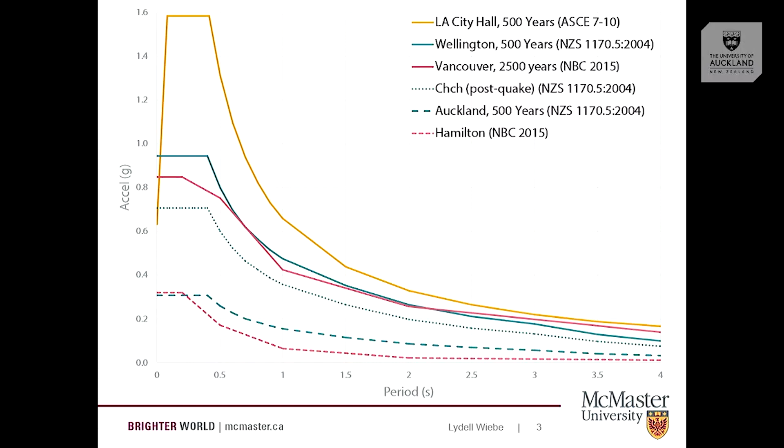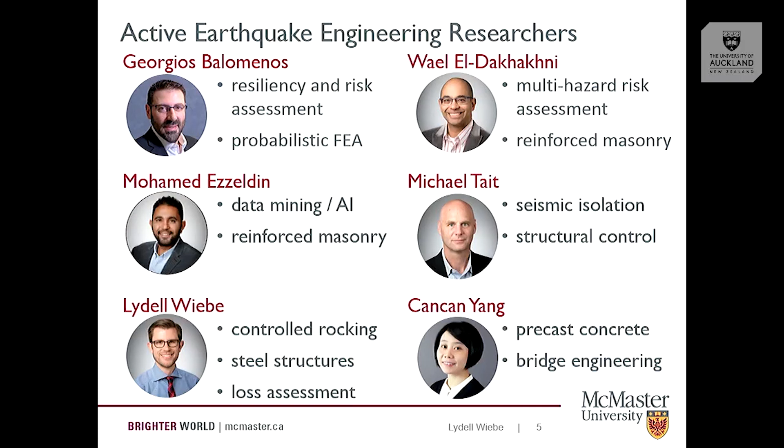In terms of McMaster University, our laboratory is not to the scale of what you have here, but there's a lot we can do. We have 3 shake tables, a series of actuators, a pretty impressive looking shock tube, and a series of other things we can do. So I'll show you some tests we've been doing at McMaster, and also some work I did during my PhD at École Polytechnique in Montreal. We have quite an active earthquake engineering research group at McMaster as well. These are some of my colleagues and myself in various aspects of earthquake engineering. So despite being far from where the source hazard is, there's a tradition of earthquake engineering at McMaster that we continue to maintain.

So with that background, my plan for the talk today is to talk first about seismic performance and what we expect if the structures are behaving as we as structural engineers might anticipate, and how we might want them to behave.

I think that many of us in this room are probably already sold on the idea that there seems to be a disconnect between what structural engineers expect and what the public is likely to expect.

I'll talk about controlled rocking braced frames in the way you would deal with them as a designer, which would be first to look at the design of the base rocking joint, then the capacity design of the frame, and then the connections to the floors. I'll go through each in more detail on the first two than the third. I'll talk about non-structural components in these systems, which I think is something we need to think about if we're looking at losses and seismic performance, and finally some other research within that general umbrella of how we might design for more rapid functional recovery.

So first off, what do we expect? What do we want? I'm sure all of you are probably more familiar than I am and have seen this presented in various ways, but what happened in Christchurch 9 years ago now. The blue dots are all buildings that were slated for demolition, and as we're quite aware, there were a lot of buildings that ended up being demolished for a variety of reasons, one of which would be the structural performance.

When I asked structural engineers what surprised them the most about the Christchurch earthquakes, the most common answer I get is, I was surprised by how well the structures performed. Given what a big earthquake it was, I would have thought we would have more significant life safety concerns with some of the buildings. From a structural engineering perspective, it seems that things are working fairly well in terms of life safety at least. And yet I think we're fairly well agreed that the public has not shared that view. So, looking at how we can rectify that disconnect.

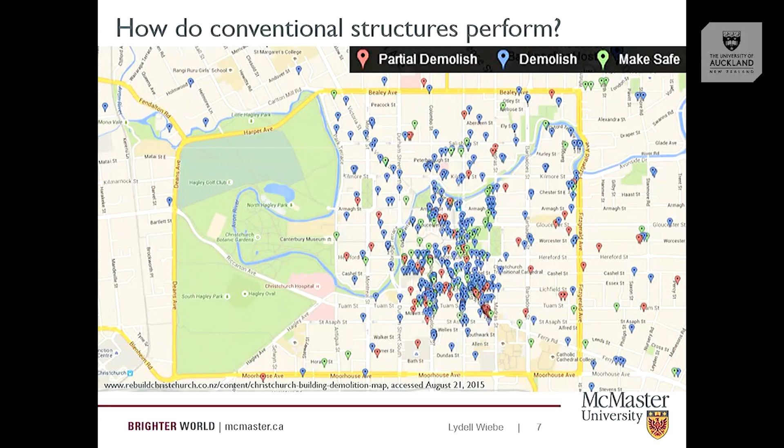I think of it in terms of a metaphor of our seismic design as being like a crumple zone for our car, which I think it even looks like a lot of what we do in structural design, as I'll show you. We design a crumple zone that will absorb the energy of the impact, and we'll design things to keep the occupant safe. I think there's a couple of key differences though between designing a car and designing a building. One is that we do not expect that every car on the road is going to get in a major head-on collision at the same time. But we do expect that all the buildings in a major urban area are likely to see quite similar levels of shaking, at least within a confined zone.

Second piece is that a car is mobile, and so if you need to replace the car, you can bring one in from somewhere else, relatively easily, and be back on the road. A building is constrained to a piece of property, and so the time it takes to figure out what to do with the building and then to repair or demolish or whatever, this, as we've seen, can take years. And then there's all sorts of other factors that come into play with cordons and insurance and all of these sorts of things. But in short, it's taking a long time, much longer than it would take for a car.

Our seismic design in steel can look like this. Here's a steel plate shear wall. It looks a lot like a crumple zone if it does what it's supposed to do. Here's a braced frame - again we have buckling of the braces. We've seen in Christchurch that there are ways of fixing things, more EBFs than CBFs there. It can be possible to fix, but still we're relying on the damage there to provide the life safety.

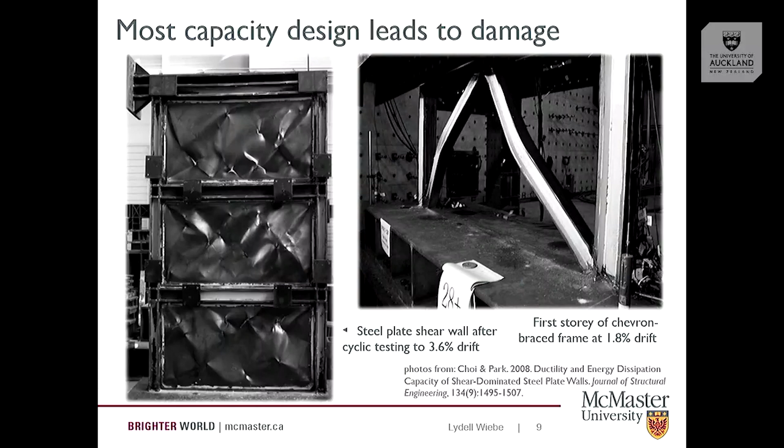And so the philosophy motivating most of my research is, can we shift our metaphor? Instead of thinking like a crumple zone for a car, can we think like circuit breakers in our home? Which also have lots of parallels. We're protecting the more vulnerable elements within the system by having something where we understand the capacity really well. But here is something where we can return it to service much more rapidly. And so that's the thinking that's motivating lots of what I'll be presenting today.

Rocking would be one system that would fit under that umbrella of trying to return the systems to occupancy more rapidly. So for a concentrically braced frame, We're relying on yielding and buckling of key structural elements, and we'll design to avoid fracture of those elements.

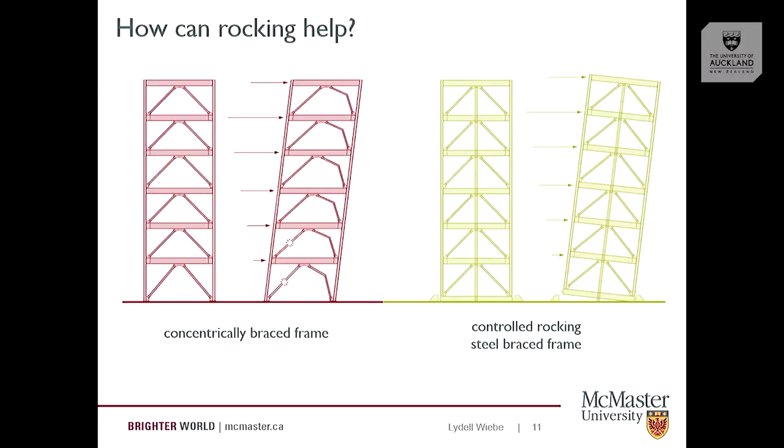We'll capacity design to ensure that the connections can develop the strength of the braces. In a rocking system, we're going to intentionally allow some limited uplift from the foundation. We will control it using a combination of post-tensioning and energy dissipation, and in that way we can have the nonlinear response that we want. It limits our seismic forces without the damage that tends to be associated with that.

In terms of the mechanics of the system, which I think are important for understanding how it works overall, it's actually fairly simple and intuitive to understand. If I think of a frame and it's post-tensioned down, when I start applying lateral force to the system, it has that high stiffness of a braced frame. So until it starts rocking, it doesn't know that it's a rocking system. Until you overcome the pre-compression at the base, it's like any other braced frame.

And then you reach the point of incipient rocking where you have overcome that pre-compression. It's easy to calculate where this is, just draw a free body diagram of the system. And then beyond that, as the system rocks, it's going to elongate the post-tensioning, and that provides a restoring stiffness to pull the system back towards zero deformation.

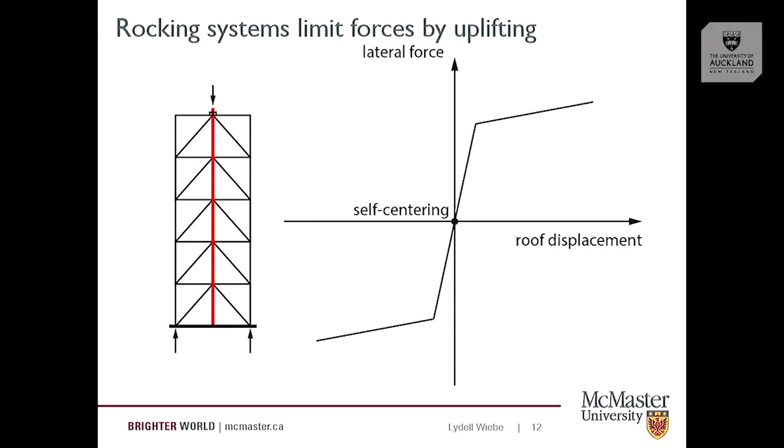If we unload and we go back the other direction, we have this bilinear elastic response, and when we take the load off, it's self-centering, so the displacement is zero whenever the force is zero. And then typically we'll provide some form of supplemental energy dissipation to help control this response.

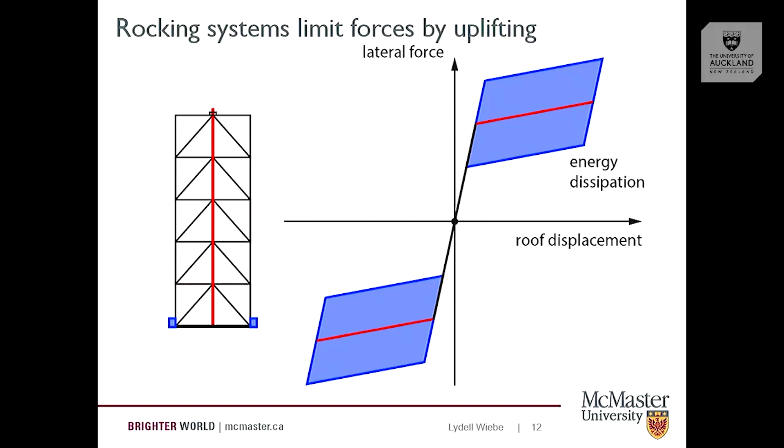There are lots of things this can look like, I'll show you some examples a little bit later. But essentially we're going to enclose some area in the hysteretic loop so that relative to a full elastoplastic system, we have less energy enclosed in a loop, but we do have the advantage that if we unload from the peak displacement, instead of having this locked-in residual displacement, we always come back through zero displacement at the end. And so that's what we're trying to achieve with these self-centering systems.

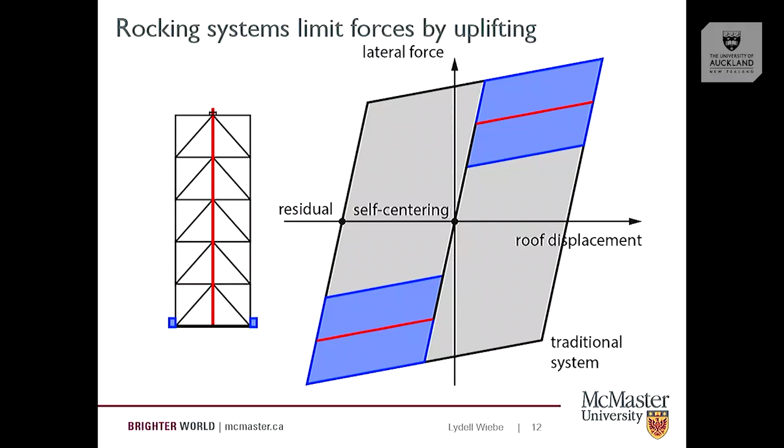In terms of what this can look like, I thought I'd start off with a video of an example of one of these. This is shake table testing that I did in my PhD, back in 2011 now. It was a 30% scale model of an 8-story frame, so about 9 meters tall, fairly representative of things, and we did this at École Polytechnique.

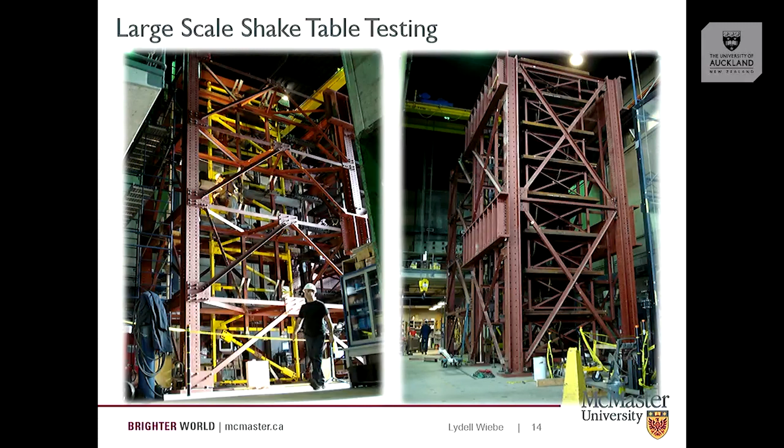On the left here is the frame. In yellow is the frame we're actually testing. The red is all lateral supports and work platforms. To give you a sense of scale, this is me working on it. And this will be a video of what it looks like in the biggest earthquake that we ran on it.

You'll have seen quite a bit of motion. Again, that was a really big earthquake. You'll have seen the uplift at the base.

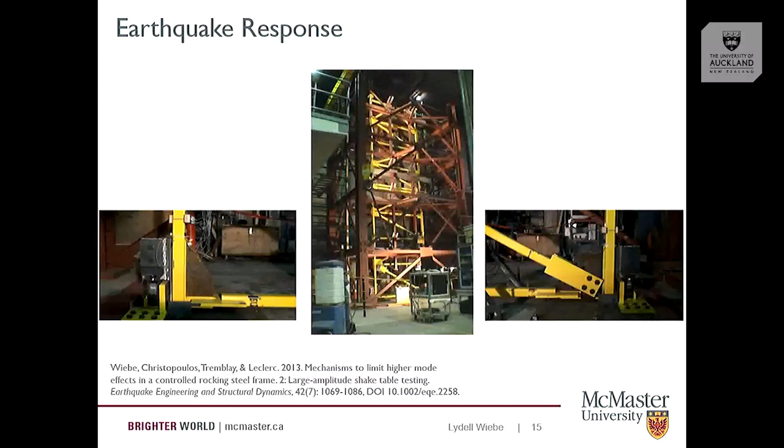You might have noticed these devices, which are friction devices. That's not the only way to build the system, but it's what we did for the lab. You'll have noticed the noise, which is coming mostly from the friction devices and from the hydraulic actuator. We ran my favorite test that we ran on the system, where we disconnected the energy dissipation, and we just did a boom with the shake table and excited free vibration. And when we did that, people would walk by in the lab and not notice that we were testing to 2% drift. It was so quiet as it rocked back and forth, which surprised me. I thought it was going to be really loud.

I should mention SCNZ has a design guide that I was involved in writing a number of years ago for the system, and it's available, published back in 2015. I think overall the framework that we set up there is consistent with what I'll talk about today, although I'm not going to go step by step through it here. There are a couple of details in there where we didn't know the answers yet, and so we put something down, and I think the research over the last few years has developed the understanding there, so there are a few pieces that I would tweak if I were doing it now, but conceptually, I still think it's a reasonable resource to refer to. So I'll point you in that direction.

So that's an overview of the performance that we would expect, where we're getting life safety fairly well, but we're not necessarily getting the return to occupancy, and that rocking provides one possibility at least to look at having a less damaged structural system, and hopefully moving towards occupancy.

So if we're thinking then about how to design it, the first step that you would use as a designer is to design what I call the base rocking joint. So essentially, what's controlling that rocking motion? What's crossing the rocking joint?

First, for the weight, the key question you have to ask as a designer is whether you're going to use a decoupled system or a coupled system, as I call it. A coupled system is one where the frame is carrying the tributary gravity loads, so the weight will be a significant factor in resisting uplift of the frame. You can maybe use some conventional detailing for the floor systems.

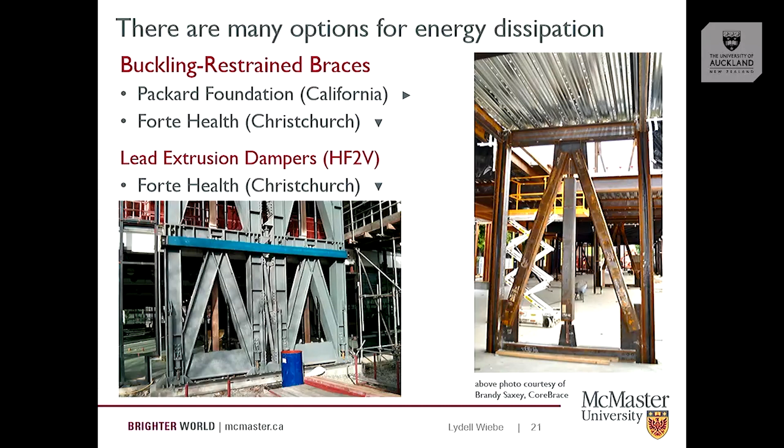Buckling restrained braces have been used — this is from the Packard Foundation in California. There have been lead extrusion dampers used at Forte Health in Christchurch, yielding plates in various configurations, and friction devices, more from a lab perspective than in practice from what I've seen, but conceptually there's no reason you couldn't use them.

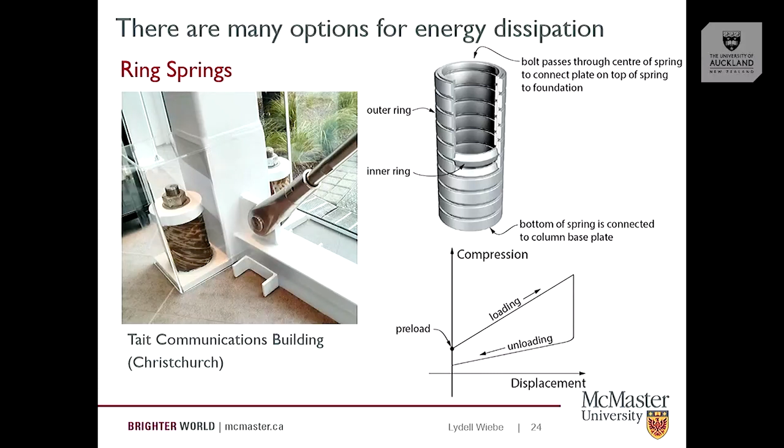Ring springs have also been used. For those unfamiliar, a ring spring is a stack of rings, some smaller, some bigger. When you compress the stack, the inner rings have to get a little smaller, the outer rings a little bigger, providing some stiffness, and there's friction between the rings providing energy dissipation. So you get stiffness and energy dissipation in the same device, which has been used in a few cases. That would be your energy dissipation.

Conceptually, you could use viscous dampers — there's lots of things you could use. But you need some way, or you will often elect, to provide some form of energy dissipation. Then, from a design perspective, if you know what you want your rocking moment to be, once you've defined the contribution from weight and designed your energy dissipation, you make up the difference with post-tensioning.

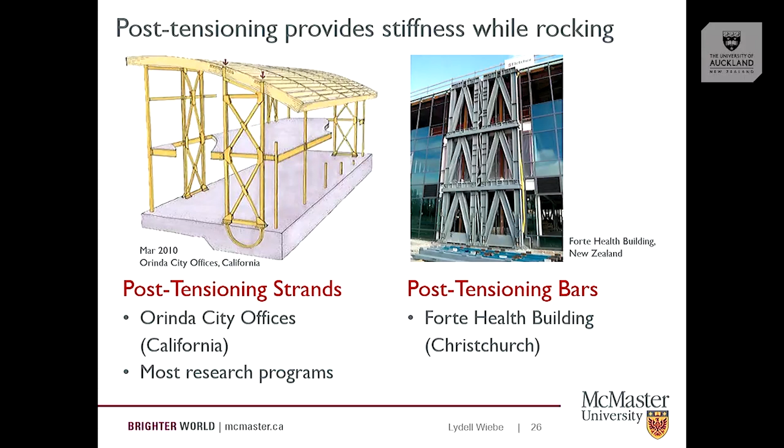That post-tensioning can take the form of strands, like they used in Orinda City offices near San Francisco, or it can take the form of bars. Its function is to provide a clamping force to resist uplift and also to provide stiffness while rocking. If you don't have that in there, you only have P-delta effects, which is a negative stiffness while rocking — not necessarily unstable.

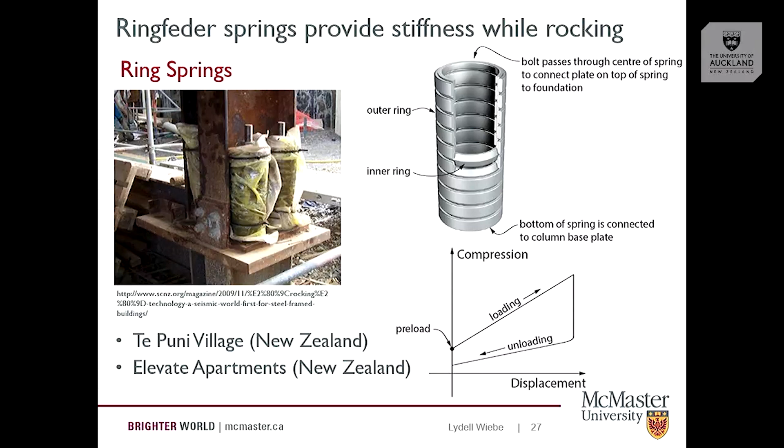There's lots of columns that have been standing in Greece for thousands of years without post-tensioning their rocking systems, but generally people, including me, will feel more comfortable having a positive stiffness in that secondary range. You can also get that stiffness from these ring springs.

So those will be the three components that you're thinking about for design, but this all presumes that you know how big you want the flag to be and what you want your rocking moment to be. And those are things that you have quite a lot of control over as a designer. It's not implicit in the system like it is for pretty much all of our codified systems. You can control the amount of energy dissipation separately from choosing the system. You control this rocking moment pretty easily.

And so what does that rocking moment need to be? How much energy dissipation do you need? From my perspective, the answer to those questions is really how large of a displacement are you prepared to accept? Because those things have a large influence on the displacement. It's not tied to ductility per se in the same way that we think about.

We tend to think of most systems as having a predefined ductility, and that controls what the strength needs to be. In this case, I think of it more like isolation, where you have a deformation capacity, and ductility is that capacity normalized by a yield drift, but you have very independent control over that yield drift. Strength and stiffness are pretty much independent for this kind of system, and therefore I find it less helpful to think in terms of ductility and more helpful to think in terms of displacement capacity, which means that as a designer, you need to be able to estimate what the displacements are on the system.

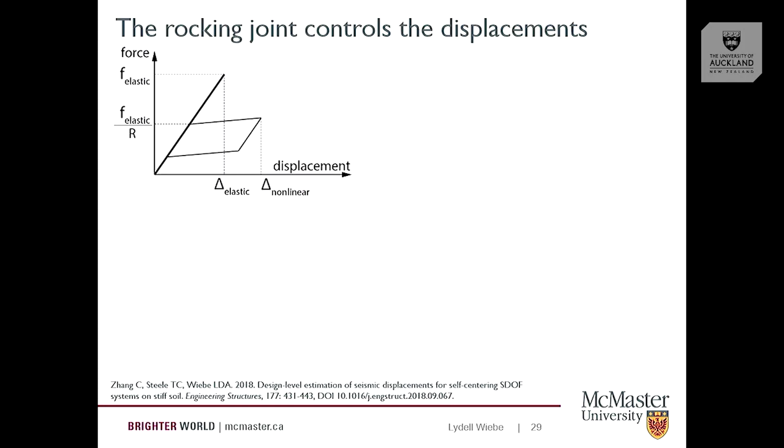So what we've looked at over the last few years is millions of studies of SDOF systems with flag-shaped hystereses, and looking at how much do they displace relative to a linear elastic system. Essentially, checking the equal displacement assumption for flag-shaped hystereses and then calibrating a correction factor to it. We find in general it does displace more. The question is how much more.

So if we look at a flag-shaped hysteresis, what I'm showing here, on the y-axis is the correction factor to the equal displacement assumption. So a value of 1 means equal displacement assumption is right. On the x-axis is the initial period, and then the three different lines are for different values of R, so something like your structural ductility factor, we call it R in North America. Essentially, R of 2 means that you're reducing your elastic design forces by a factor of 2.

So if we have R of 2, so a system that's fairly close to linear elastic, and if our period is not short, then equal displacement assumption works well if we also have the maximum possible energy dissipation while staying self-centering. So that's a lot of ifs, but we can get something like the equal displacement assumption there.

If we start increasing the value of R, so having the system rock more easily, then our displacements go up. R of 8 is the largest value in the US code. R of 30 sounds crazy because nothing is anywhere close to there. But again, I'm not thinking in terms of ductility. I'm thinking more in terms of displacement capacity. So it's not necessarily unstable when you do that. It just has bigger displacements. If you're prepared to accept those displacements, it's maybe OK. So those would be those factors.

And then if we look at having less energy dissipation, so this would be the extreme where you provide no supplemental energy dissipation, then your equal displacement assumption becomes less accurate. You need a bigger correction on it. But again, if you're prepared to accept those displacements, then you might not necessarily need energy dissipation in the system, as long as you are OK with those displacements.

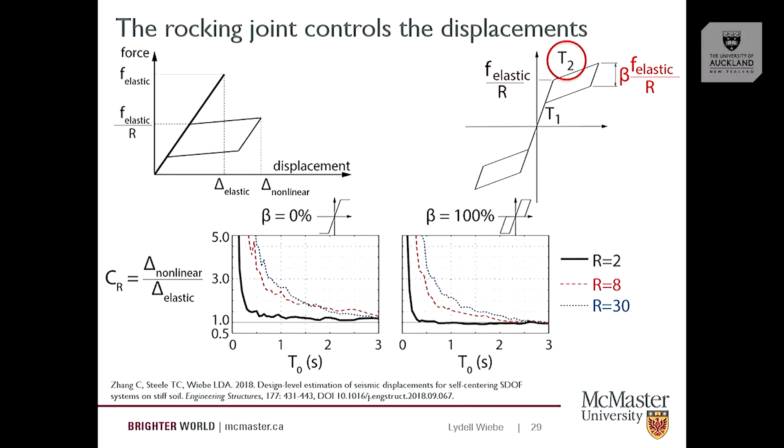We also looked at the influence of this secondary stiffness and found that it had the least influence of any of the parameters within a fairly reasonable range. If it's very high, so you're close to linear elastic with just a bit of softening, then it matters. If it's negative, in some cases, then it matters. But if it's fairly close to flat after the system is rocking, it's not terribly significant, which is why I've tended to quantify things this way as a correction to the equal displacement assumption, rather than using direct displacement-based design, which is all based on a secant stiffness, which implies that this stiffness matters a lot. So we came up with a regression.

This is the form of it, and we find it provides a reasonable estimate of the displacements for a self-centering system, at least for the cases we've looked at. I'd be very happy, there's people in the room looking at self-centering systems, if you tried it out and found out if it worked for your systems.

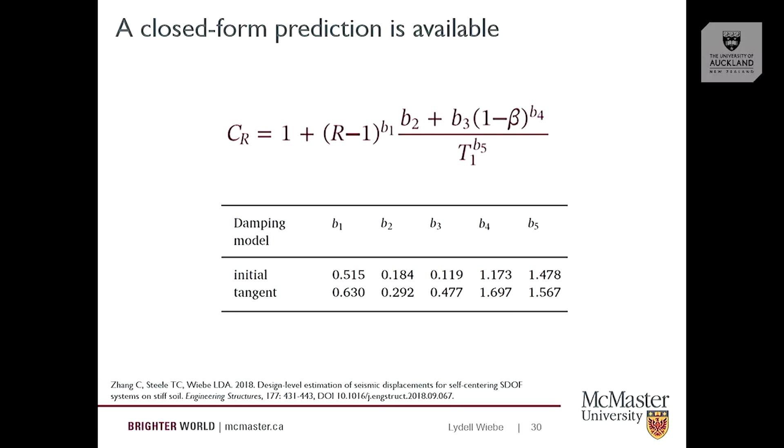Looking at what this means for collapse fragility, we've looked at questions like where do you want your post-tensioning. If you have a given rocking moment and put your PT at the edges, it's stiffer while it rocks because you've got a larger lever arm to that post-tensioning. If you put it in the middle, it's more flexible while it rocks, but it also has a larger displacement capacity because you have less strain on the post-tensioning. So we looked at the interplay between those and tried to see where we would want it to be.

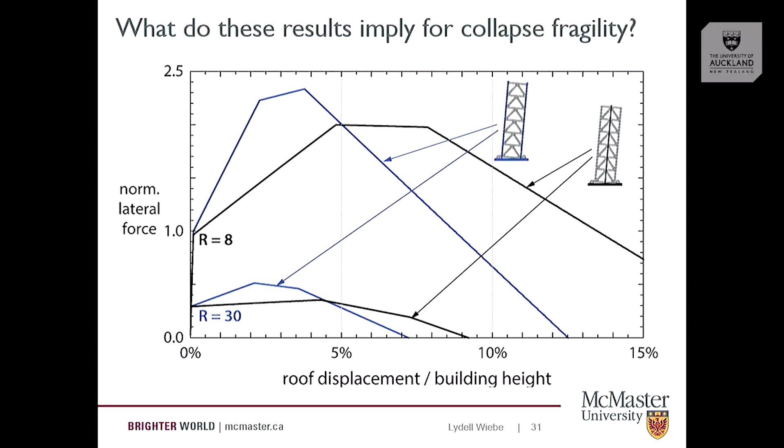Based on some modeling, I should mention it's fairly simple to model. It might feel complicated because you're not used to modeling it, but unlike most of our conventional systems where you have to calibrate some sort of material model, in this case we're relying on gaps opening, which is fairly easy to calibrate as long as you can get it to converge. Getting it to converge is not necessarily as hard as it might sound.

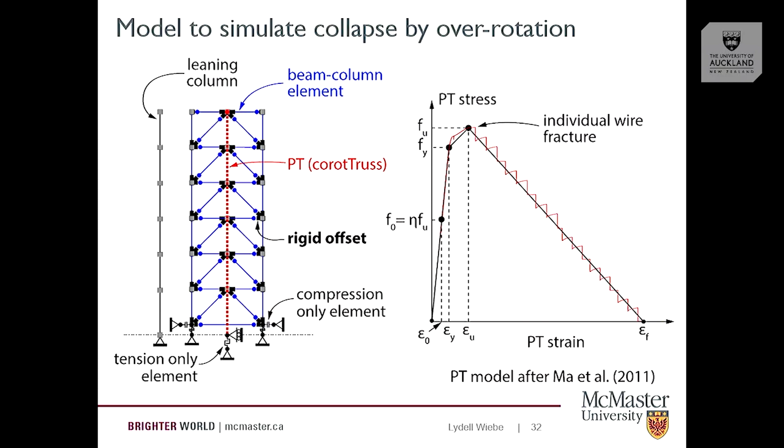In terms of collapse fragility, this is showing on the x-axis how big the earthquake is. 1 is an MCE level event for California, and we went out to huge values because we could. Looking at the probability of collapse, what we find is having it in the middle is generally better than having it at the edges, so you have lower probability of collapse. You would rather have that displacement capacity, even though you have slightly larger displacements.

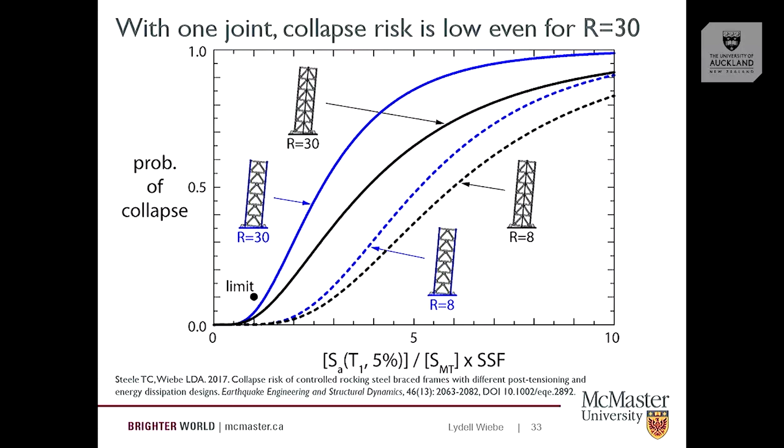Using R of 30 gives a larger collapse fragility, so it's more likely to overturn than if you use a larger rocking moment. But regardless, we're still falling under the 10% probability of collapse in MCE that FEMA P695 determines. So even a very aggressive value of the rocking moment can still provide enough stability as far as our analyses can tell.

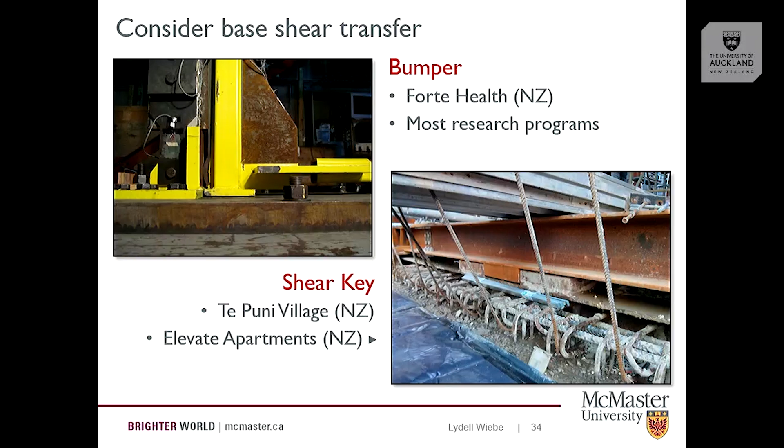One last note on the design of the base rocking joint: I've been talking about moments, but you also need to get the shear into the foundation somehow. Sometimes that's done with a bumper—here shown from my lab tests, but this is also what they did at Forte Health. I've also seen it done with a shear key at the base. So those are some options for designing the base rocking joint to control displacements, along with selecting the post-tensioning and energy dissipation.

The next piece is, after you've designed that base rocking joint, how do you design everything else in the frame? What are the loads on those members? This kind of boils down, maybe oversimplified, to a question of how heavy the frame needs to be.

What we see is we got nowhere close to fracturing the post-tensioning at the base rocking joint, but the moments above the base were quite a bit larger than what you might expect from a pushover. Your base shears could be more than twice what you would expect from a pushover. So this is fighting against capacity design, where we're trying to cut off the forces by having a well-designed fuse.

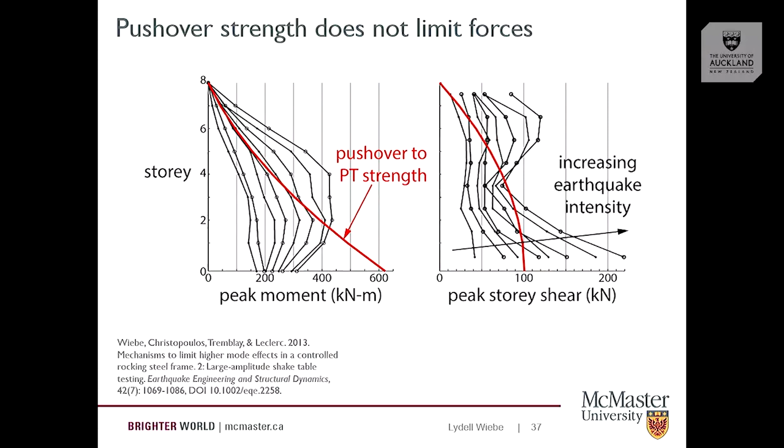We're finding that the moments and the shears continue to increase from there. The way I think of this is as it rocks, you're going from a fixed-based system, shown in black, to a pin-based system, shown in red. You're removing the rotational restraint at the base. If you do that, you can compute the mode shapes for a pin-based structure, even though it's unstable.

Mode 1 is the unstable mode. Mode 2 has a longer period, but generally has a fairly similar shape in terms of displacement, forces, shears, and moments. Mode 3 gets even closer, and so on. So you can think of it in terms of the combination of these modes.

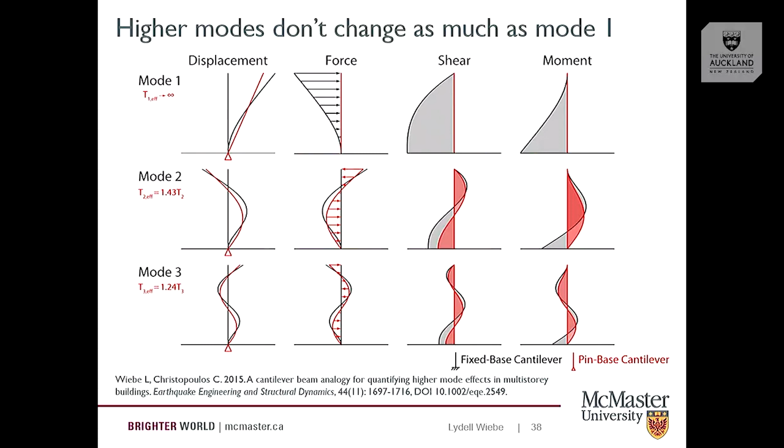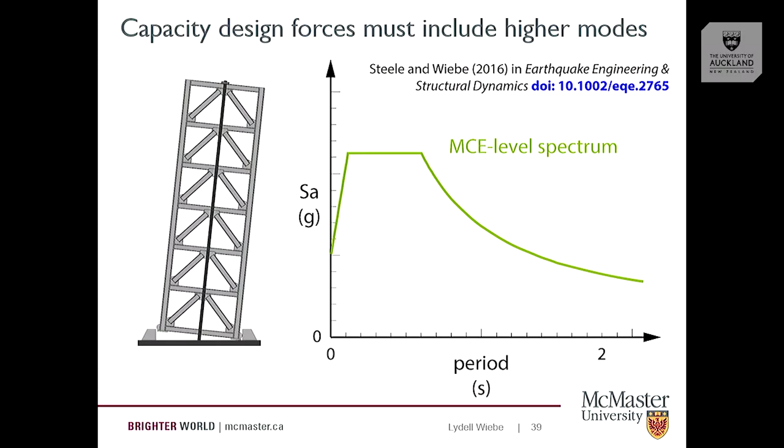And then we turn this into a design approach as well. So for one of these frames, if we're modeling what's happening while it's rocking, and we have a design spectrum, what we can do is take a model that you'd have in SAP or ETABS and model it like this. You keep one of the pins at the base, the other one you take away, you show the energy dissipation that's on there, you apply your pushover forces, you apply the post-tensioning to whatever you're expecting to be the displacement or the maximum capacity, however you want to do it, and then you add the higher mode effects computed from a response spectrum analysis as done within ETABS. So it's something you can do within a computational program you're using anyway.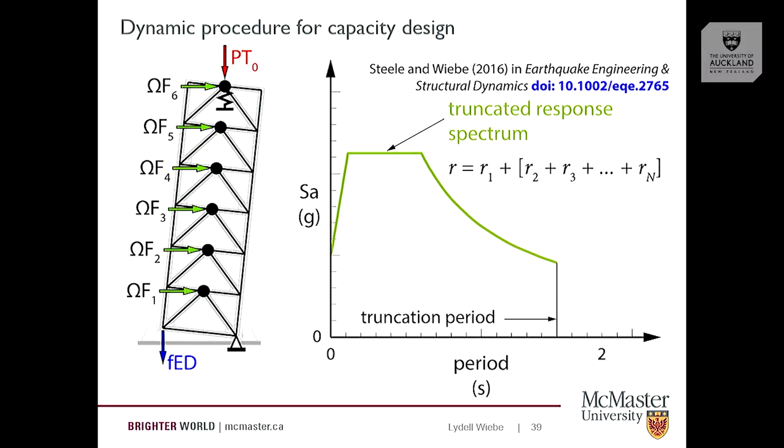The other approach we've looked at is to simplify things, because here you have to play with your boundary conditions, which is a bit of a pain if you're changing your design back and forth. So we look at an equivalent static approach where we simplify what we expect those forces to be.

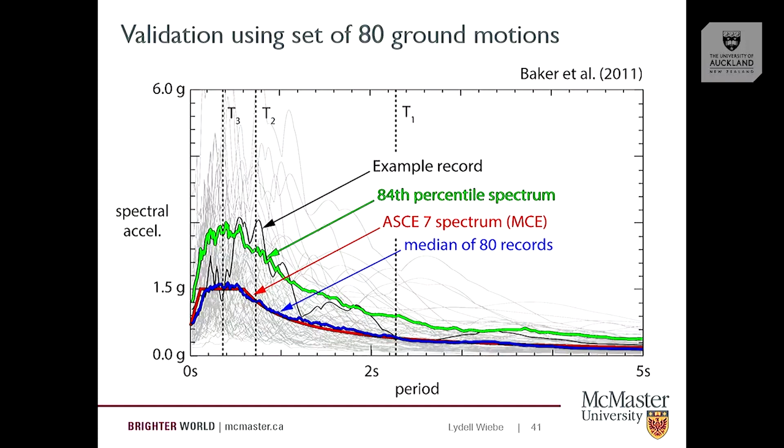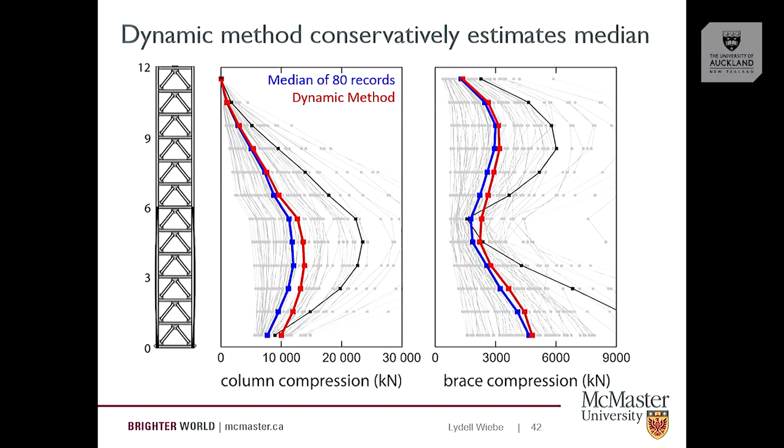To validate it, we look at a set of 80 records. This is the target spectrum, and blue is the median of those 80 records. We looked at this example for a 12-story frame. The blue is the median, and the red is what we get from modeling with the changed boundary conditions. You see we can capture the column compressions, which look a lot like a moment envelope, and the brace compressions, which look a lot like a shear force envelope, by using this approach.

If we use the equivalent static forces, we also get something that seems quite accurate, and it's not an empirically calibrated approach. It's all based on theoretical assumptions about how things behave.

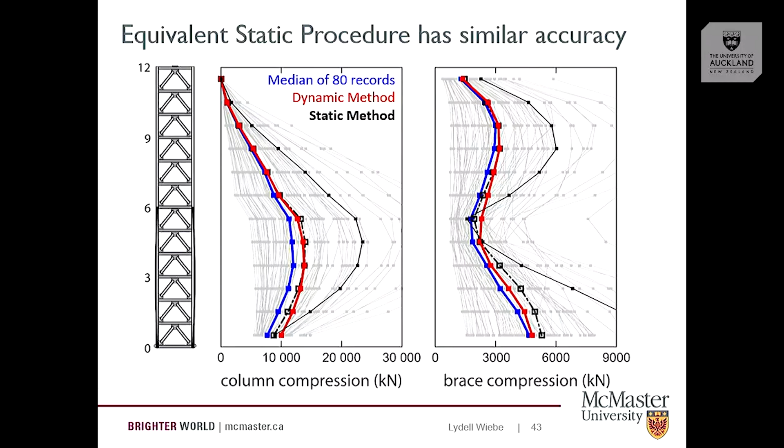We can target it to whatever level of excitation we want, because as the earthquake gets bigger, the demands get bigger, which leads to the question of how large you should target. If you don't consider those higher mode effects at all, and just design based on the pushover, you get the gray line here. If you design for 3 times your design spectrum, you get the black line. If you design for, say, 1.5 times design shown in blue, that would be MCE in Canada or in the US, which is a lot of what's been recommended or assumed by researchers. There's a pretty big difference in terms of the design forces on the elements of your frame.

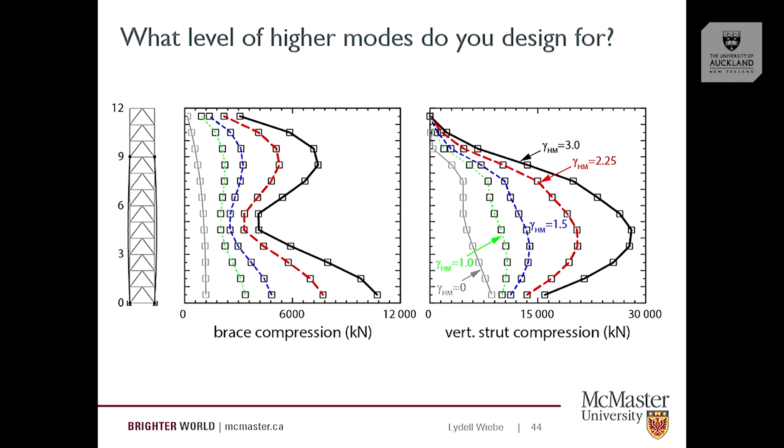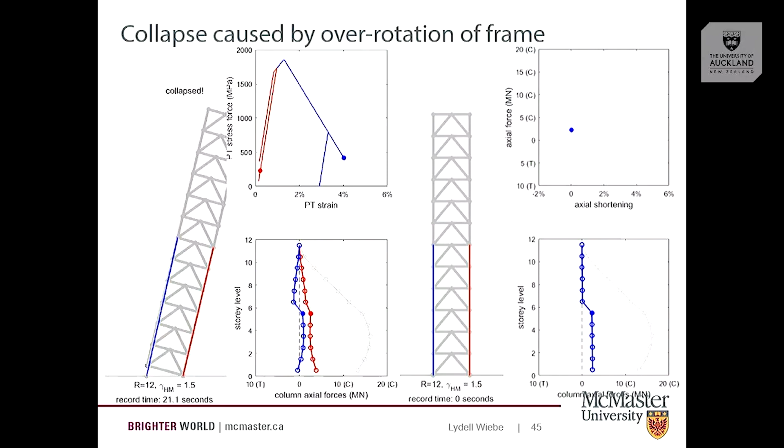The philosophy motivating this is: what would be the code minimum for this sort of system? If we wanted it to behave at least as well as anything else, what do we need as a minimum? So to prevent collapse, we model that sort of thing. We also model what happens if there's buckling and yielding of frame elements. In this case, we'll see buckling of that column under a slightly different earthquake. Again, we're looking at modeling what happens in that case.

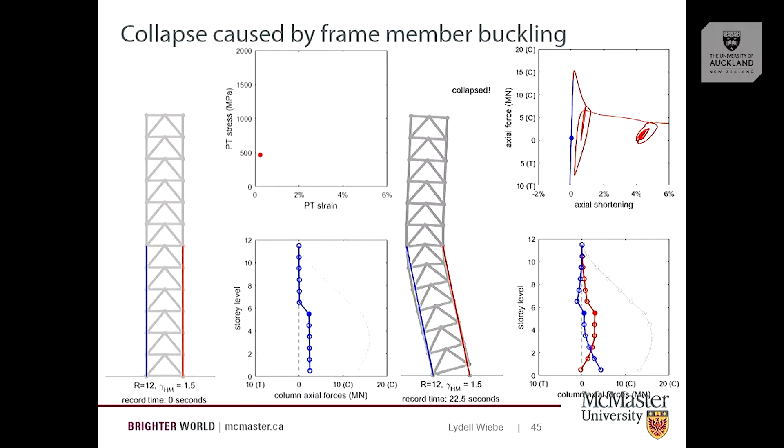So it depends on how you've designed things. If you really over-design your frame, it's going to fail by overturning. If you really under-design your frame, it'll fail by elements buckling and yielding. And ideally, we would calibrate both so that it's not going to fail under a reasonably defined earthquake.

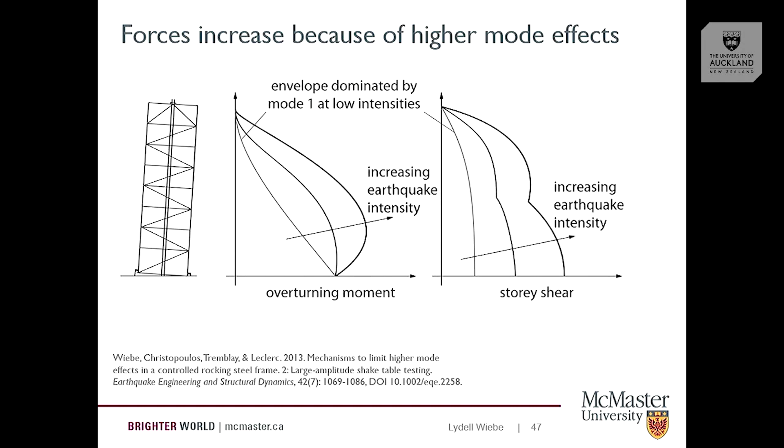Finally, on the higher mode effects, all of this is assuming that you just have a rocking joint at the base. But some of the thinking during my PhD was, if you can control that rocking at the bottom by having moment control at the bottom, why limit yourself to one location? Why not have rocking at a second location, where you should limit the moment there, and then you would expect that to help control the moment between those locations. And because the shear force diagram is the slope of the bending moment diagram, you would expect to get some control over your shear forces.

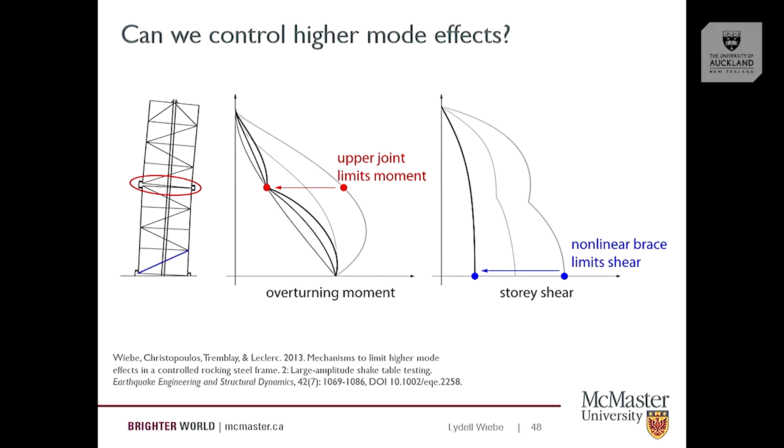Or, if you put a fancy brace in here that can still be self-centering, but that can cut off the higher mode shear forces, that should help to control your moments.

So we took the same experimental setup I showed you before. It was built as two frames, one on top of the other, so we could clamp them together, and that's the first video I showed you. Or we could release that clamping, and replace the brace at the bottom with one of these fancy self-centering ones, and look at, for the same frame under exactly the same earthquake, how the response compares.

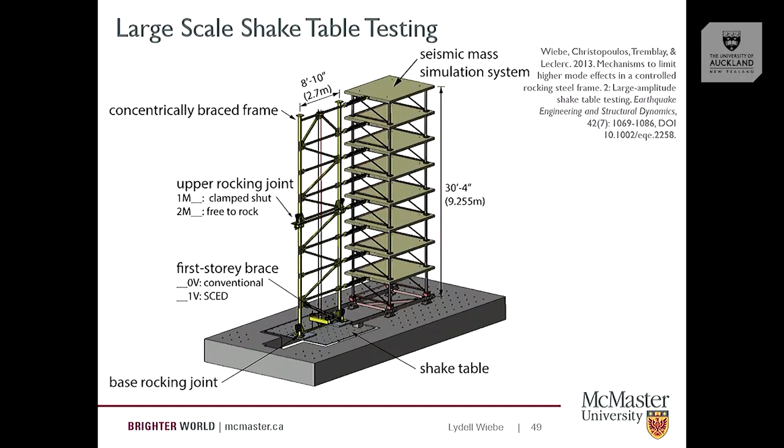And here's a video of the same earthquake, but in this case it's allowed to rock at this upper joint. You won't see it in the video because it's very fast and it opens about 5 millimeters. But you will see the motion of this brace, which is a self-centering energy dissipative brace.

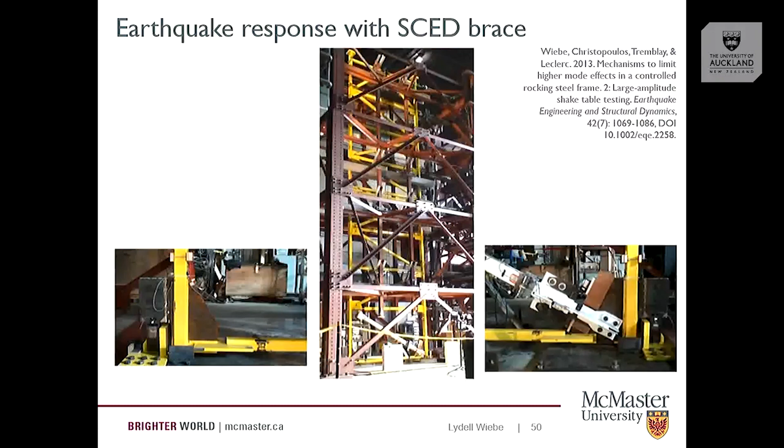So unless your eyes and memory are better than mine, you won't be able to compare that directly. So let me do that for you. This is from the first video I showed you, and this is from the second one. The area grayed out is the area outside the envelopes of displacement, shear, and moment. Shears and moments are calculated based on the accelerations of the floor masses.

So you see the displacements in this case are almost the same. They're a little bit bigger in the second video, but maybe 10% bigger. The shears are roughly half of what they were in this case. The moments above the base are much more controlled.

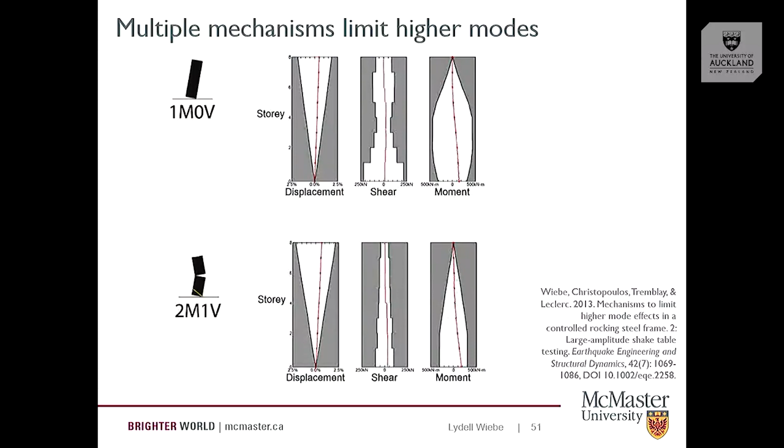And if I animate it, again, this is not a computer simulation, this is what we measured in the lab. You'll see that the displacements are quite lined up between the two. It's driven by the first mode of response. But those shears and moments are cut off by having multiple mechanisms in the system, which is like what we have in most codified steel systems, where if you develop higher mode forces, something yields somewhere else. But that's not the case with a rocking system with rocking only at the bottom.

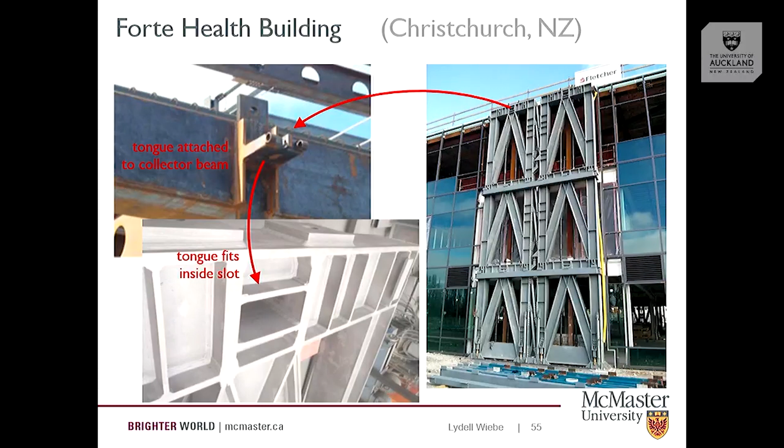So those are some issues related to the capacity design of the frame. Moving a little bit more quickly on the connections to the floor diaphragms. I talked earlier about this idea of coupled versus decoupled. If it's coupled, the connections may not need to be so fancy. If it's decoupled, then we need something that can transfer the horizontal forces without lifting the slab up along with it. So in Forte Health, what they did for this is they have this tongue that's coming out of the collector beam, and that fits inside a slot so that when it's trying to transfer the load, the frame can lift up without engaging that floor slab, which seems like a reasonable solution.

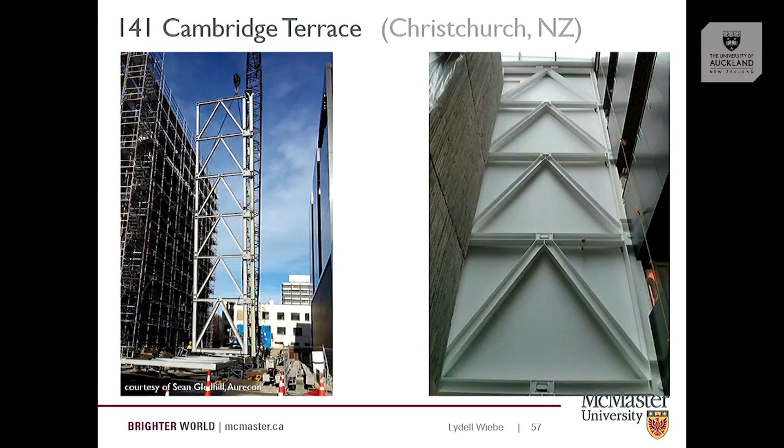At 141 Cambridge Terrace, they used a similar detail, and they also provide a pin in a slot so that there's essentially a backup system if either of the two doesn't work the way that it's intended to. This is what it looked like, or another picture of it in practice.

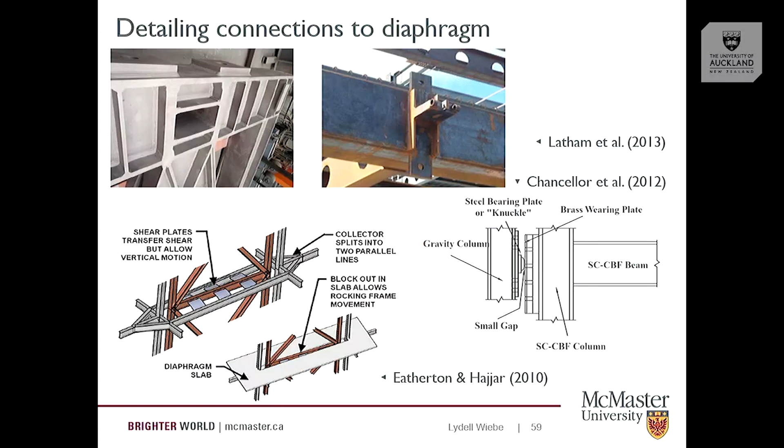And there have been a number of options that have been suggested in the literature. Not many of them have been tested, so this is something we've done at Mac over the last few years. These are the three that we tested at McMaster. There's a bearing plate type system where we have a rounded plate on a solid one. We tested a pin in a slot, and we also looked at a wide flange connection.

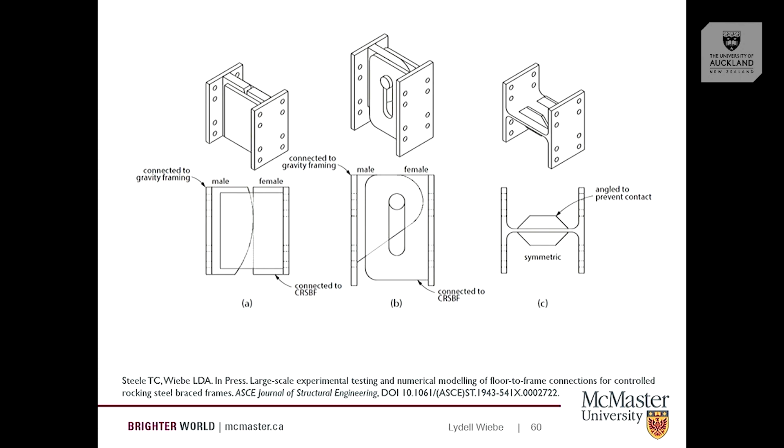So here we're going to yield essentially the plate so that there's relatively little resistance to uplift, and look at how these perform. It's a 60% scale model, and I'll show a time lapse of this testing. It wasn't dynamic, it was static. The way this is working is this gray beam is simulating your collector beam, so load is being applied to it by an actuator, and that transfer mechanism is hidden behind here.

It's transferring very large horizontal loads, up to about 1,000 kilonewtons, into the yellow frame, and we're controlling this red beam with actuators acting down on it, simulating the post-tensioning, energy dissipation, and all the things that control the resistance of the system, so we can see a fairly complicated combination of displacements and forces and how that load is being transferred.

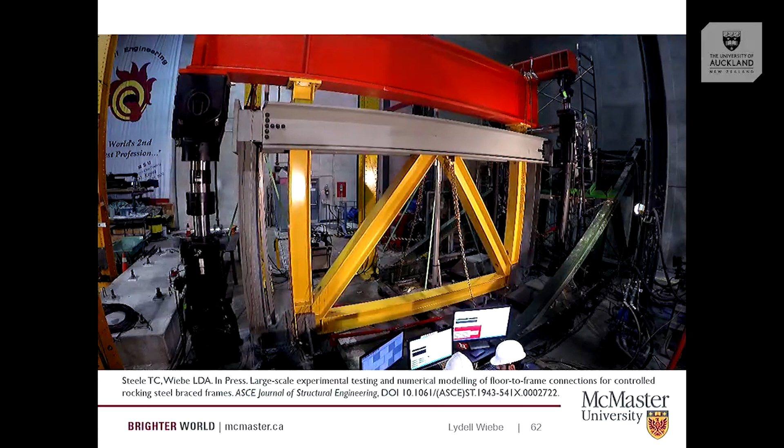And here's what it looked like for the bearing plate system. You see it's not that far off, actually, from a flag-shaped hysteresis, which is not necessarily bad, although there's no energy dissipation in the system that we were testing. So this is coming entirely from the friction at that connection.

Often the way these have been designed is assuming that you can transfer the load and that it'll be like a perfect slider where there's no energy dissipation. So you might look at this and say, this is a good thing—I have energy dissipation I didn't count on, so I'll have less displacement than expected. You could also look at it as I have larger forces than I expected, and that might be a concern for capacity design.

So my view tends to be, this is not insignificant. We should probably be accounting for it in design if we expect it to be there.

We got similar performance if we put the pin in a slot, but we were able to get rid of that if we wanted to, so we could get something with very, very little energy dissipation. The way of doing that was by having the pin only on one side, the side that was pulling.

If I have a rocking system and I'm applying my load in compression here, then I have lots of sliding there and lots of energy dissipated. If I put it on this side, where it's pulling, I don't have very much displacement, and since force times displacement is the energy, I'm not going to dissipate much energy. So from a capacity design perspective, this might be preferable, although it's dissipating less energy.

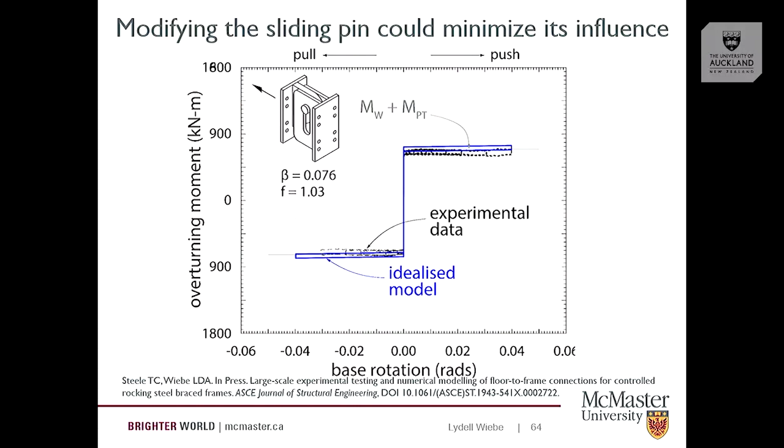But it's about trying to get our buildings to behave in a way that's consistent with the models, either by changing our models or by changing the buildings.

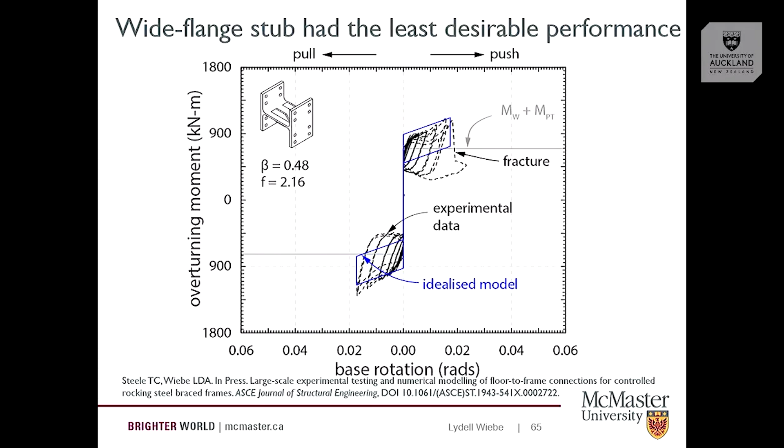Finally, that wide-flange stub had the least desirable performance overall. It probably feels more comfortable because you have a full mechanical connection in there, but it fractured at about 2% drift, which, if you control your displacements, is maybe okay, but it's kind of on the low end, and a less repeatable response than what we saw with some of the others, at least in the short term.

Finally, on the controlled rocking system, non-structural components are something we need to be thinking about. There's not much value in having wonderful, seismically isolated, top-of-the-line non-structural components in a building that needs to be demolished after an earthquake. But by the same token, if you have a wonderful structural system and everything in the building gets trashed by the earthquake, your client will probably not be terribly satisfied with that either.

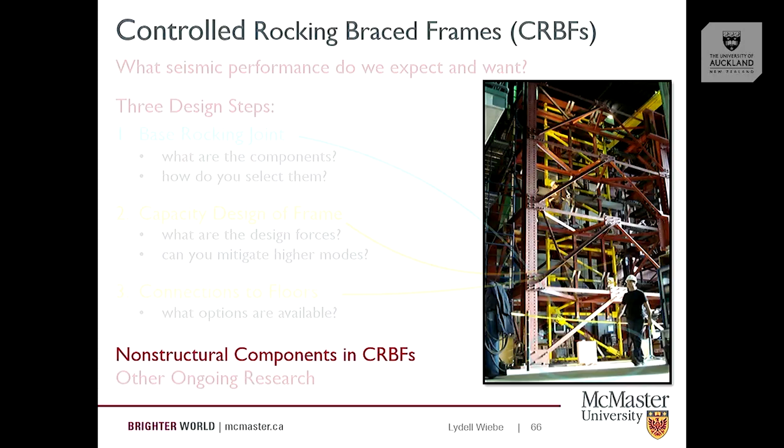So we've been trying to quantify these demands a little bit better, with two key questions. One of them is, will that change in stiffness from low to high at a velocity cause acceleration-related damage? This is based on some theoretical work showing that if you go from low stiffness to high stiffness at velocity, we'd expect an acceleration spike.

Notice this occurs only in a system with a flag-shaped type hysteresis. With a more full elastoplastic hysteresis, you're always softening—you're always going from high stiffness to low, except when you change direction, and then your velocity is 0. So it's something unique to this system that might be a concern.

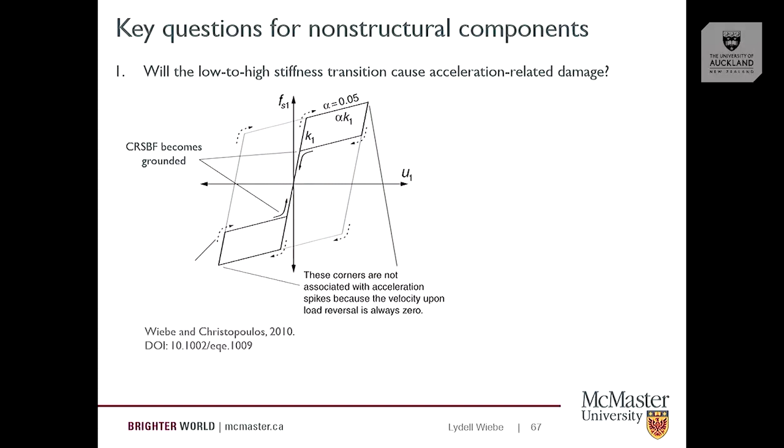That's how I thought about it, and then it was put much more memorably by some people at the University of Canterbury, where they say if you're on a motorbike with very little resistance to your motion, and then all of a sudden there's a spike in stiffness, you'll expect a large acceleration due to that. So this is the image that's in my mind, and I'm sure it'll be in your minds now too.

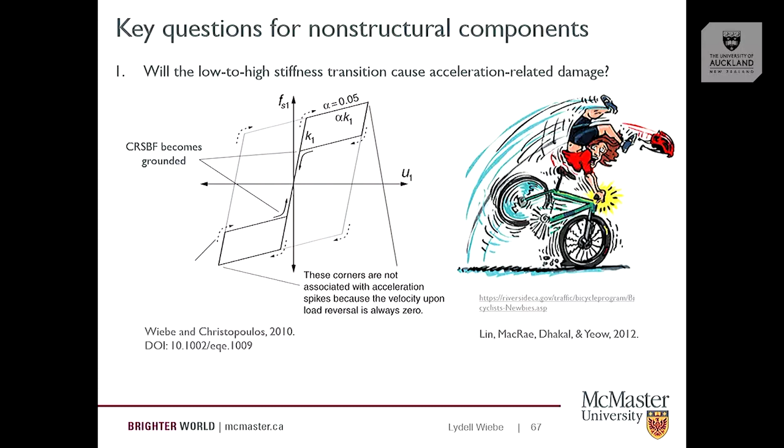And this would be scary. At the same time, from the shake table test that we did, we looked for this sort of thing. We put accelerometers all over the place, and we found, yes, you can measure an acceleration right beside the place of impact, but by the time you get to the floor diaphragms, we weren't able to pick up on any acceleration spikes related to this impact. So we wanted to re-examine this and see, were we missing something? It wasn't obvious in the results, but maybe in the floor spectra it would show up.

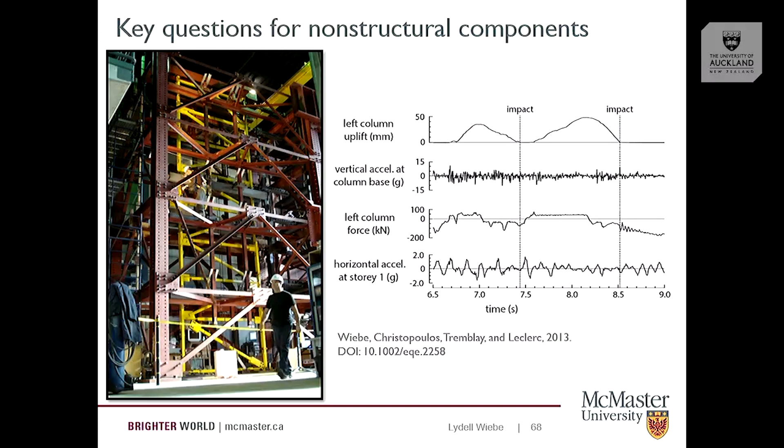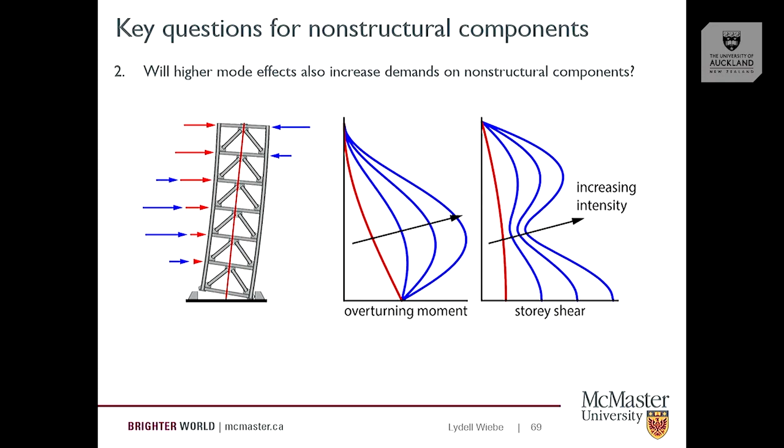The other question is these higher mode effects that I've been talking about. If they're driving the forces, well, force is mass times acceleration, there could be some big accelerations that go along with that as well. So this is one of the examples.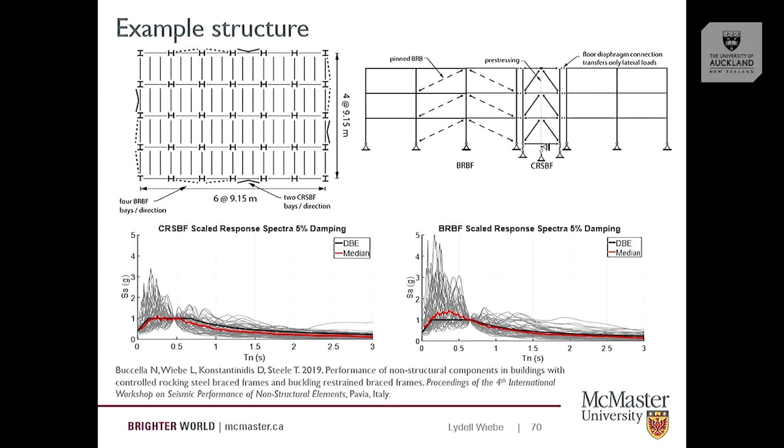We've done this for a number of examples now, but this is one from a particular conference paper where we compare a buckling restrained braced frame and a controlled rocking braced frame. They're not in the same building, they're just shown in the same figure here for a place in California. Essentially what we did was we designed both with R of 8, and then we tuned the designs to have the displacements be comparable. So we can look at acceleration demands from the perspective of the same displacement demands.

What that meant was the controlled rocking system, we could allow it to rock a little bit earlier because it's quite stiff. The buckling restrained braced frame, we needed to stiffen it up in order to get our displacements to be the same, which we set at 1.5%, saying we probably want lower displacements in a high performance system.

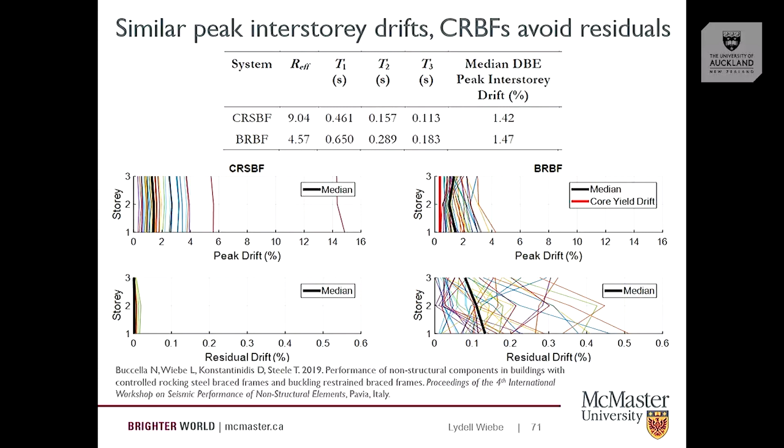So in terms of drifts, the two are comparable. The residual drifts for the rocking system are essentially 0. For the buckling restrained braced frame, they're not zero, they're not huge. I usually like to use a buckling restrained braced frame as my poster child for bad residual drifts. But at a design level event, we're finding we're under 0.5% in most cases, which means we could probably fix it. But still some preference from a structural perspective for the self-centering system.

When we look at floor spectra, the ground level ones are a little bit different here because in this case we scaled the ground motions a little bit differently. But if I look at the roof spectra, and it's similar at other levels, at relatively long periods relevant for non-structural components, the floor spectra are higher for the buckling restrained system. For those of you who aren't familiar with floor spectra, it's like a response spectrum for the ground, just using your floor input as the input instead of the ground motion.

In blue is the controlled rocking system, and we get this really peaky floor spectra, where around the second and third periods, we get very large acceleration peaks. I don't know yet how significant that is in terms of damage, but it is a potential cause for concern that we do see these higher mode influenced peaks in the floor response spectra. And those short periods tend to be relevant for a lot of our attached non-structural components, sprinkler systems, for example.

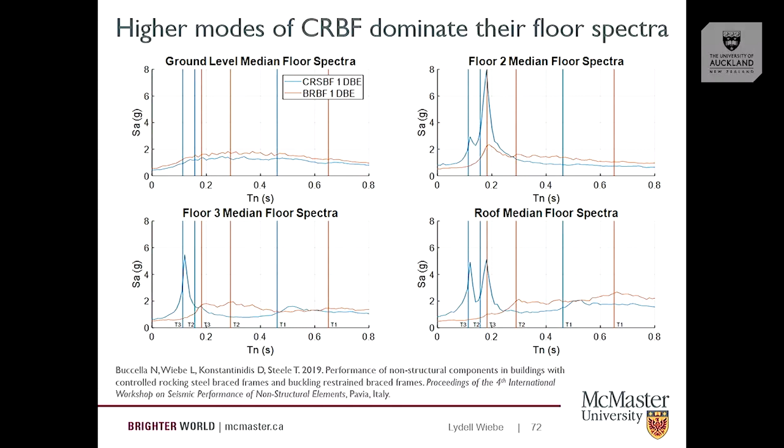So those are some thoughts on the non-structural components. Just to wrap things up before taking questions, a couple of words on not controlled rocking systems that are also things that I've been looking at recently.

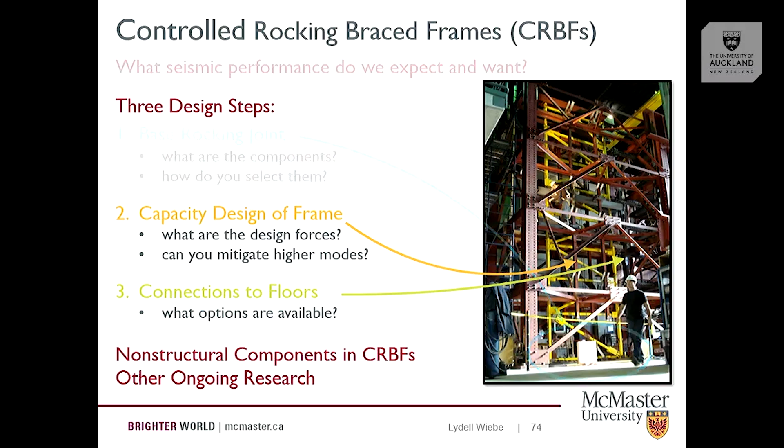Let's skip through that. I'm looking at rocking with other materials as well. Most of what I've said today is completely independent of the fact that it's steel. The rocking is what's controlling the response, not the material. So we're looking at rocking wood, we're looking at rocking masonry. In those cases, there are detailing issues to think about. There are considerations in terms of what combinations of post-tensioning and energy dissipation might be attractive. But conceptually, from the mechanics of the system, it's quite similar.

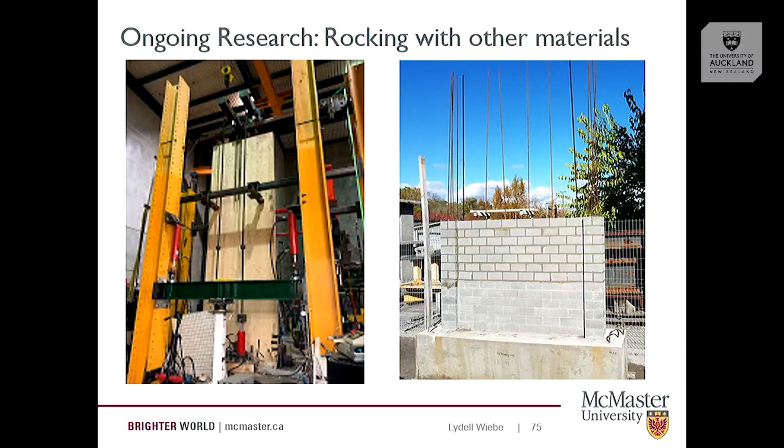So those are tests. These ones just finished up, we haven't processed the results yet. These we will be testing later this year. We've been looking at replaceable brace modules.

This is the idea: if you're designing a concentrically braced frame that will be damaged in a design-level earthquake, why not plan for how to fix it afterward? One concern with conventional detailing is that the gusset plate promotes out-of-plane buckling of the braces. If it's on the exterior of your building, you've got a 50-50 shot it buckles in the direction of pushing the cladding off while everyone is evacuating, a potential life safety concern.

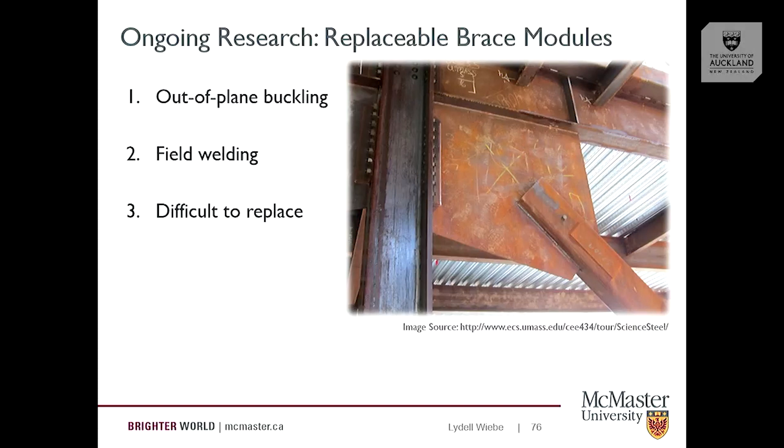In North American practice, we usually use field welding for these connections, though we tend to prefer bolting on site and welding just in the shop. They're relatively difficult to replace after an earthquake because the damage isn't just to the brace, it's to the gusset plate, which is welded into place, so you have to cut it out and weld a new one in. It's doable, but not as simple as it might be.

So we've developed a replaceable brace module where we try to constrain all the damage into a module that's bolted into place. A stiffener plate is welded in the shop onto a beam, and the brace is bolted in, which promotes buckling in the plane. We try to increase erection speed by bolting on site, and make it easier to repair after an earthquake.

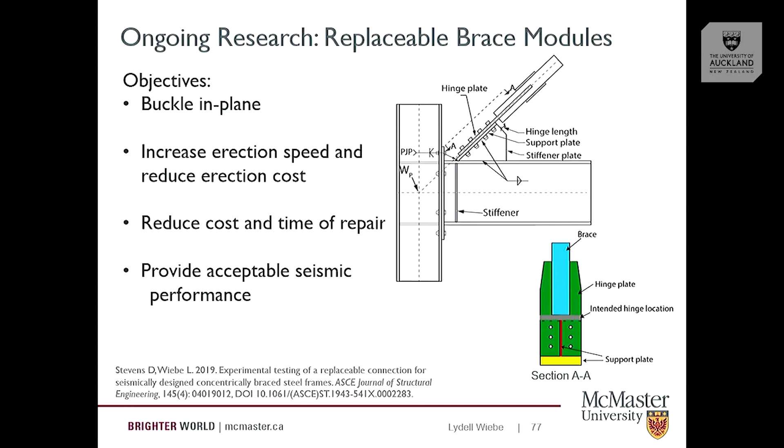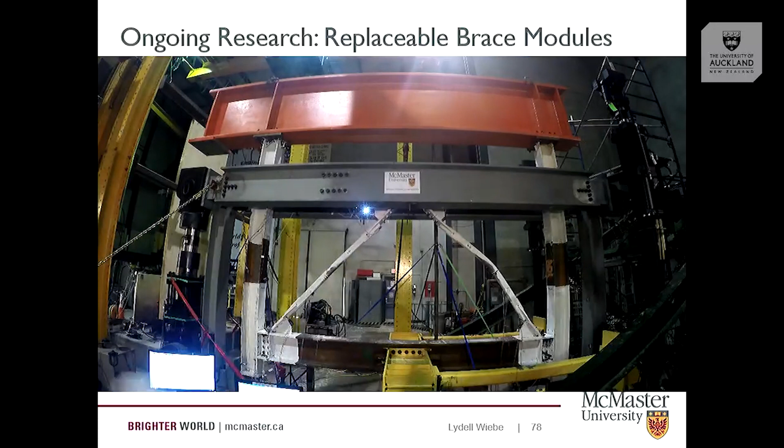This is a time-lapse of testing we did a few months ago on this system. These are the brace modules. We tested with the braces in place, then after breaking them, took them out, put new ones in, and repeated the test to see we got essentially the same performance, then pushed further with different beam-column connections. Overall, the system behaves as we'd expect a more typical system to, but it buckles in plane, and we limit damage to the part we're unbolting.

Finally, this topic has interested me over the last couple of years. I've talked about structural design and some non-structural aspects, putting them together, because overall I think what the public is interested in is the overall system, and most of the value of our building is not in the structure itself.

Performance-based earthquake engineering is pretty well defined at this point, even though there are a ton of assumptions that go into it, involving a number of steps. We've been looking at whether upgrading non-structural components has a cost, and whether you get a payoff in savings on annualized losses due to earthquakes. Also, changing your structural design influences the demands on non-structural components, which also affects overall losses. So we've taken a set of potential structural designs, wrapped it in a genetic algorithm to optimize and see what overall provides the best outcome.

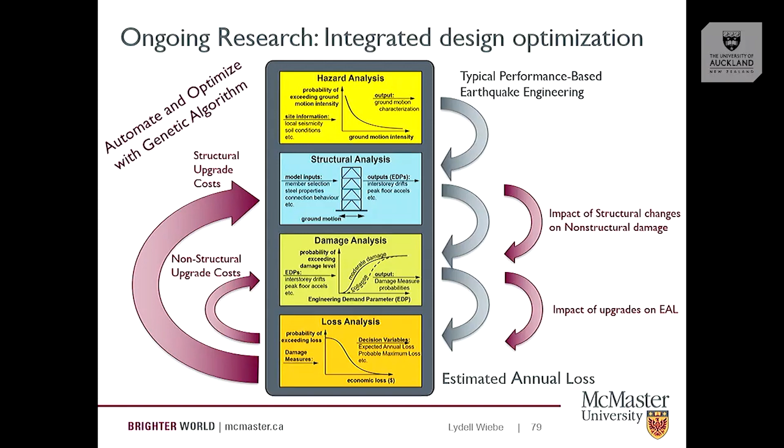Essentially, if you're a client deciding where to spend your money: do you upgrade the structural system, spend it on non-structural components, or do some mix? For one case study, a three-story building with pre-Northridge connections, putting in viscous dampers worked out great. It was the best option and worth doing, even if it reduced money available for non-structural savings, because it helps control both displacements and accelerations in the system.

In terms of non-structural upgrades, there are many different things to look at. From an economic perspective, mechanical equipment is often worth upgrading, especially the chiller, which tends to be relatively cheap and easy to upgrade, with relatively high losses in the event of an earthquake. So that's something we're playing around with and seeing what it means for different systems.

You showed that New Zealand example with the floors decoupled, and then the other one with the floors not decoupled. Do you get any damping or energy dissipation issues from the floors being coupled that you need to take into account?

So just so it's on the recording, the question had to do with energy dissipation you might get within the coupled system in this case. What we found from the lab tests is that energy dissipation is non-negligible, which you could think of as a good thing. Most of the time it has been non-modeled and taken as a positive, but it could also increase your capacity design forces.

So is that hard to model on the left-hand side? Most researchers, and as far as I can tell designers, have tended to assume that this one is easy to model because it's negligible. What we're finding is it's not negligible, and so there's been a tendency to avoid this system because it seems harder to model. But I'm not sure it's actually harder to model—it just feels like it's going to be harder to model.

A decade ago I hadn't done the lab tests yet, and at that point I was totally not sold on the system. I was at that point in my PhD—those of you who have done graduate degrees know this experience, the trough in your PhD where you feel like the system you're studying is a bad idea and you're wasting your time looking at it.

Then I did the lab testing, and it convinced me that it could actually be a good idea. By the end of that, I was thinking this is the way to go, because I was really worried about the impact problems and some of the challenges in modeling this accurately. At this point, I'm more swinging the pendulum in this direction. I think this will be easier to build, and I think we'll be able to account for some of the modeling challenges. I'm not sure we're all the way there yet, at least in ways I'd feel confident in, but I think 5 or 10 years from now this will be the way I would tend to go.